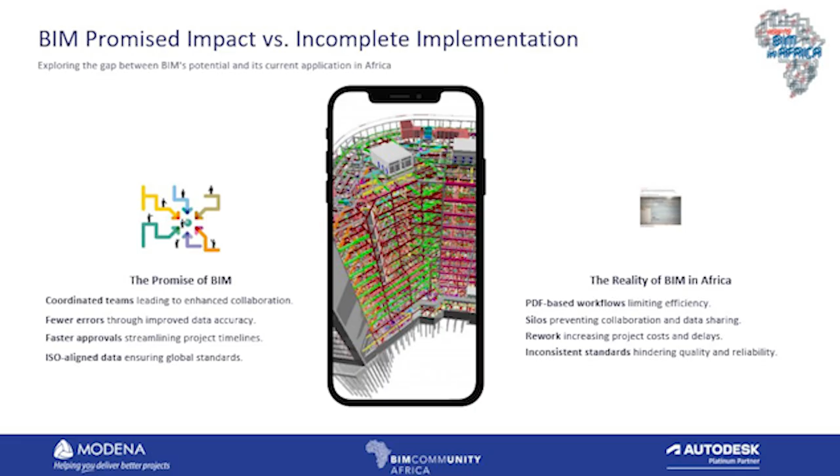I know tomorrow you guys are going to get back to your offices and still carry on with your incomplete work, right? And the promise of BIM told us that we'll have coordinated teams, fewer errors in your work, faster approvals, and ISO-aligned data. And the reality in Africa right now, we still have PDF-based workflows.

Most frustrating thing ever, I'll tell you a story about that. Everyone is still working in silos, and there's still a lot of rework and inconsistent standards. I've got a BIM execution plan, and one of the standards there was a document from America trying to deliver a project here in Africa with South African QSs, et cetera. So those kind of problems are still happening in the industry.

And our adoption challenges, like I mentioned, it's mainly fragmented teams. We see it day to day in projects when we get into construction projects. Structural engineers, architects still not working together. Engineering's the more best one, my favorite one. Fire engineers still giving out not even AutoCAD drawings, like hand drawings, et cetera.

Try get a fire engineer. No hate, sorry to the old guys. I hope there's no old fire engineer who's over 50, 60 to give you a Revit model on a project. It's the most difficult thing to do. So we have a lot of fragmented teams in our industry and in Africa.

I'm just talking South African context at this stage. We've got SANS 19650, but those are ISO standards converted for our environment, and thanks to the BIM community for doing a lot of that work. The biggest one for me is the skills and training gaps that we have, and it creates a big problem in adopting the software and adopting the process. I want to mention, just a low BIM maturity.

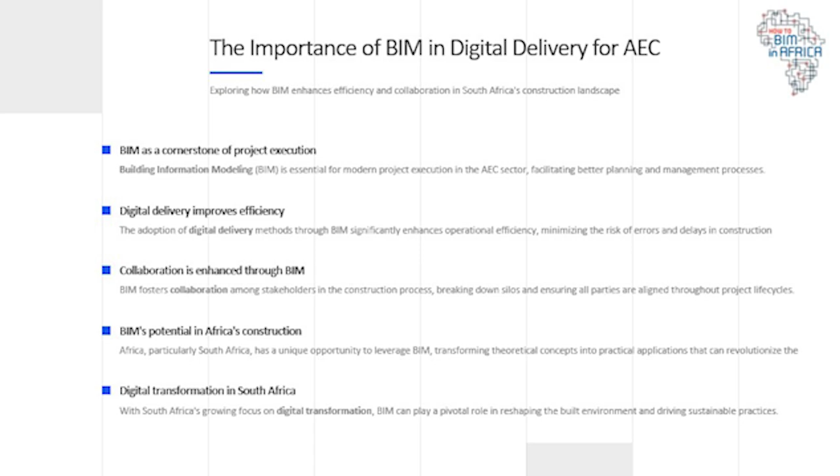So the importance of BIM and digital delivery for our industry: BIM is a cornerstone of project execution, like what we've been saying the whole day. And without us structuring our data, we can't really deliver a digital project.

So these are the priorities that we look at when we engage with you as our clients and customers. Digital delivery improves efficiency, collaboration is enhanced through BIM, and BIM has great potential in Africa as well.

I just want to get ahead to the standards that we do. The way we align your standards, we're looking at our SANS 19650 standards that have been published with the SABS, obviously with support from industry. I'm repeating myself, so I'm going to leave a lot of it out.

So Modena's pioneering role in BIM standards in South Africa: firstly, we are the lead assessor of 19650 in South Africa, and we've done a lot of work in BIM as well. We've got a specific structured 8-step workflow that I'll show you in a moment, that assists you guys in getting your companies ready.

Another thing that we look at is enhancing project information management, and that helps driving transformation in the continent. I will talk about how we help you enhance your project information in your offices.

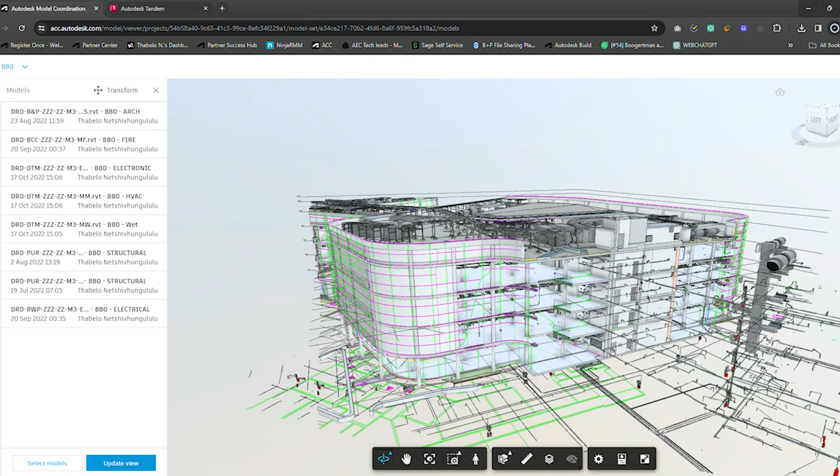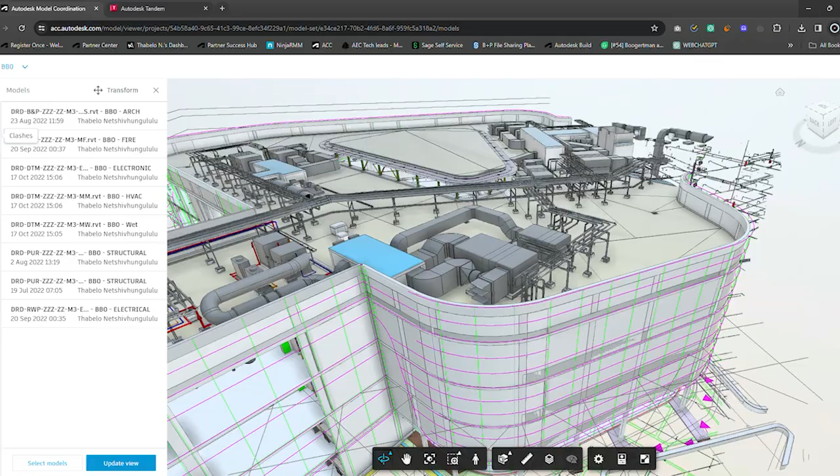Chasing time here. The specific project is a South African one. It was handed over, it's like around 85,000 square meters. But when we got into this, they still had a whole lot of issues and clashes and stuff. I'll just quickly show you. This project had around, I think, 75 different models. But during design phase and construction, we managed to get the project down to like 0 clashes in certain areas, not everywhere. Certain areas, yeah.

Yeah, just a story. Right, so there's just one of the blocks on there you could see just clashes.

If I tell you about clash detection a little bit, a lot of us think model coordination and clash detection ends when construction starts. You have to marry what you're doing at design phase with what's happening on site. You can't just hand over a model and say go build it. So you work with your main contractors, subbies, etc., sit in RFI meetings, deal with those issues on site, and use your BIM model and that information to address the issues faster.

When your data is structured correctly, you can make use of BI tools, business intelligence tools like Power BI, to visualize your data. I had a project in Cape Town.

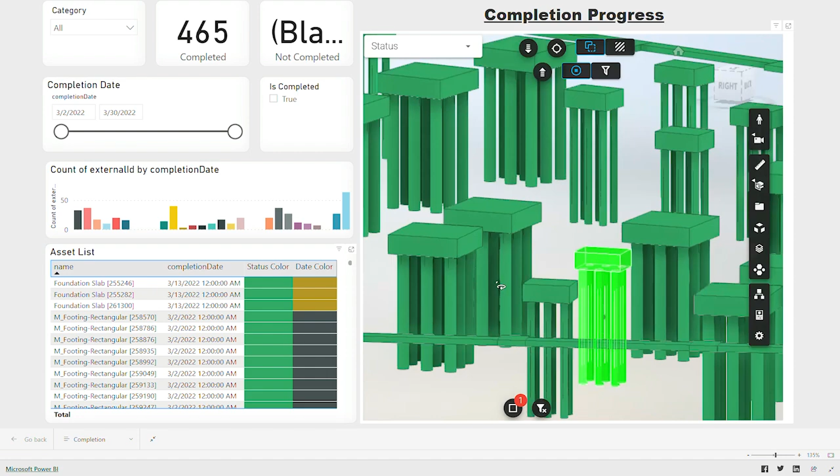At first, we were dealing with issues and clashes on ACC. I don't know if you guys have ever seen it, it's like line items after line items. At that time, we were sitting in a coordination meeting trying to go through like 2,000 issues. I introduced a Power BI dashboard, because at that time you're dealing with engineers and project managers at a high level, and that really improved the way we communicated in the meeting and kept track of who was where and who's done what.

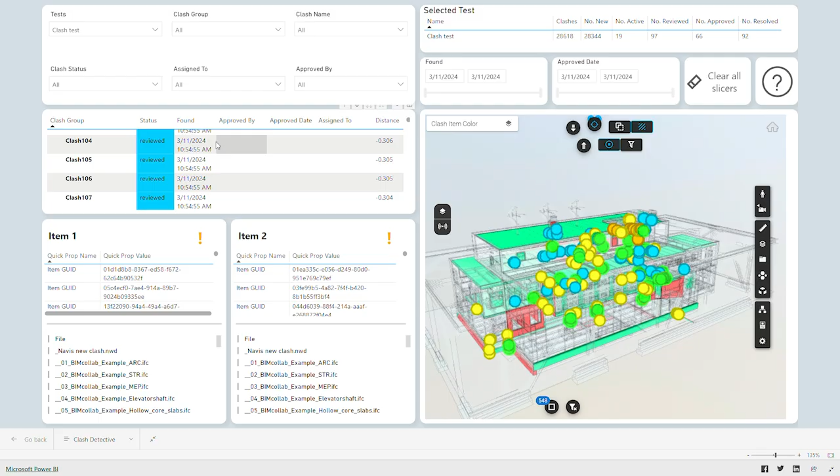Here's another example, from a Navisworks model. I don't know if you guys still do Navisworks clash detection, where we literally just highlight two models, get a report, and send that Excel file to people and expect them to know what to do with it. So we just grab that and put it on Power BI with the model as well, and with the data from Navisworks and your Power BI setup, you can actually use coordination in a better way.

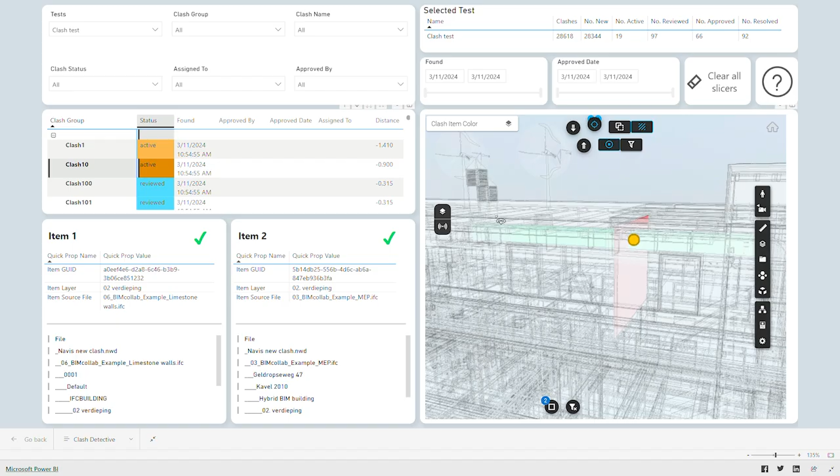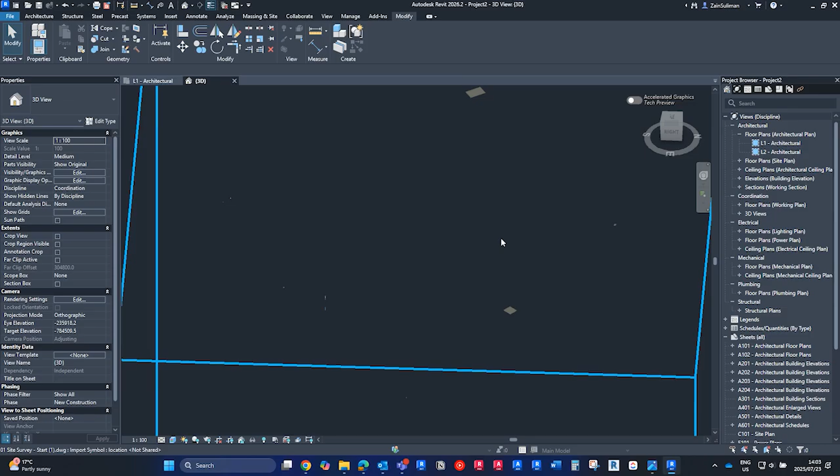You guys know when you bring in a DWG as an architect, etc., you might find that it's got triangulation and stuff. I looked for a button for this, but there was no button on Revit. So Zain in our office put together a quick script, didn't even take him too long, just to clean up how Revit puts together a topo solid.

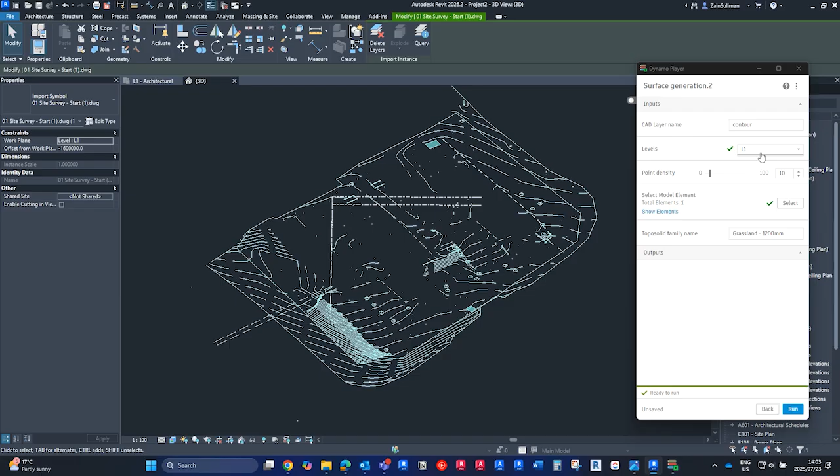That's just a Dynamo player on Revit. He selected the contours, put in the density, and ran it. You'll see that little area he zooms into looks a little bit better than what Revit normally gives us. A support case came in, and it took him like 15 minutes to put a script together and send it back to the client.

Lastly, I like this one as well. Recently we were appointed to do a scan on Garden Court at the airport. Our scanning team went out and took, I want to say quick, one day to scan the facade of the hotel, and bring it into Revit, register, etc.

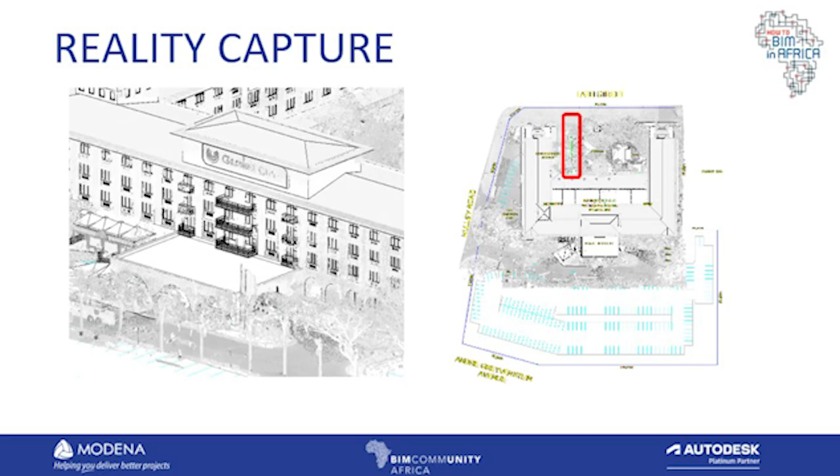Interestingly, for this specific project, the client had received drawings from council, but the drawings from council were inaccurate. You see the little line I highlighted there, that's where the building line started for the specific building. But when we scanned, we obviously got more as-built and accurate information, and from there that's what the guys produced.

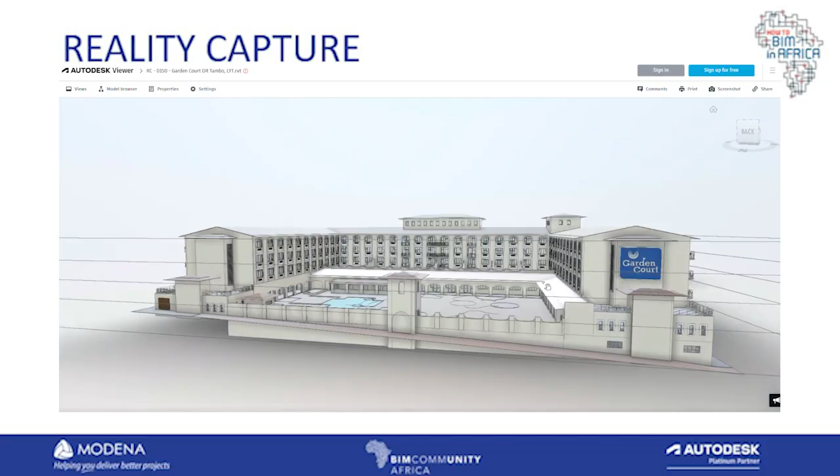It took Chris over here 7 days to get this facade modeled up from that point cloud. This was then handed over to the architect, and one week later they were able to start designing their new facade from our reality capture work. So it's just the correct way to use tools and put them in the right place, you'll then be able to achieve your information properly.

Chris, is the information in this model? Yeah, just check it, there's a lot of information. A window is a window with the right tag, etc., and then they can quantify it and so on.

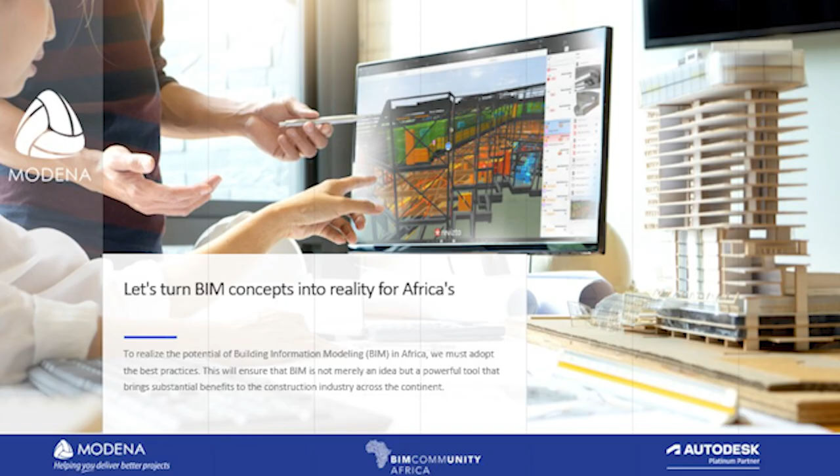In closing, Africa's built environment is transforming, and the adoption of digital tools is about to revolutionize the way construction projects are managed across the continent, enhancing our productivity and efficiency. By implementing BIM effectively, firms can now streamline project workflows, reducing time and costs associated with construction. So let's just turn BIM concepts into reality for Africa. Thank you.